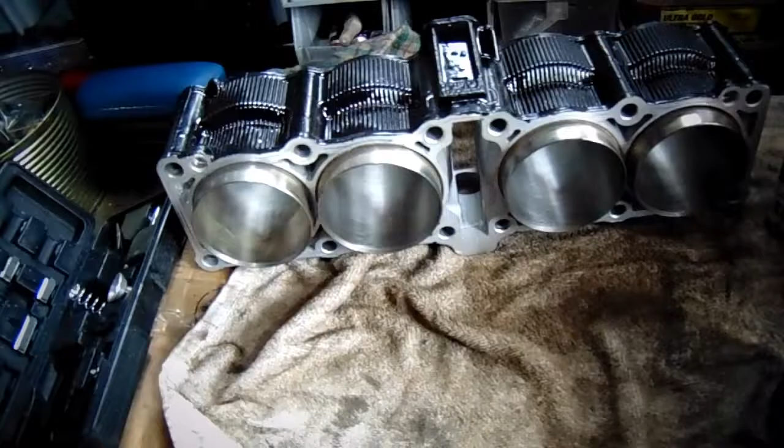Hello guys, so while I'm waiting for the gasket set to come for that, I figured I'd get the barrels down and give them a go with the old hone.

Yep, I use that when I'm a bit bunged up. I just get it up there and it doesn't half clean you out.

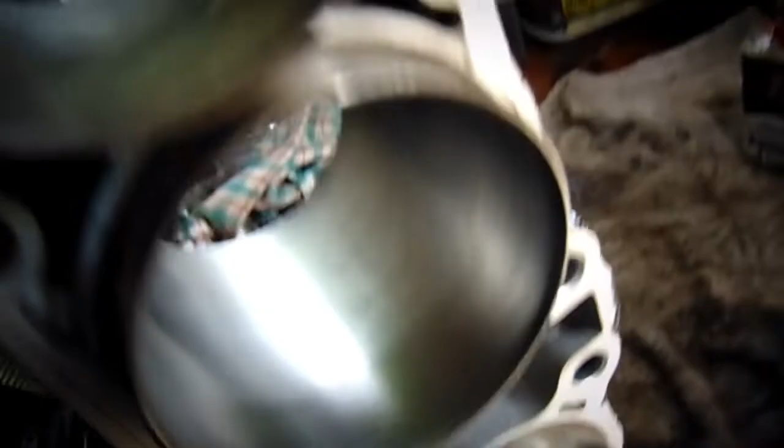Anyway, I've done the bottom three, and you can probably see where I've done it. Come on, I don't even know if this is focused in. Like I say, my eyes are going. So I've got this one to do now, so I shall do that one.

And then what I'll do then is get the pistons and start measuring them, seeing what size piston rings I get and stuff. So two seconds while I hone that one.

So they're now honed. Oh, there's a tiny bit of paint there that I just need to get off. So I'll get that off in a minute. So they're now done, lovely jubbly.

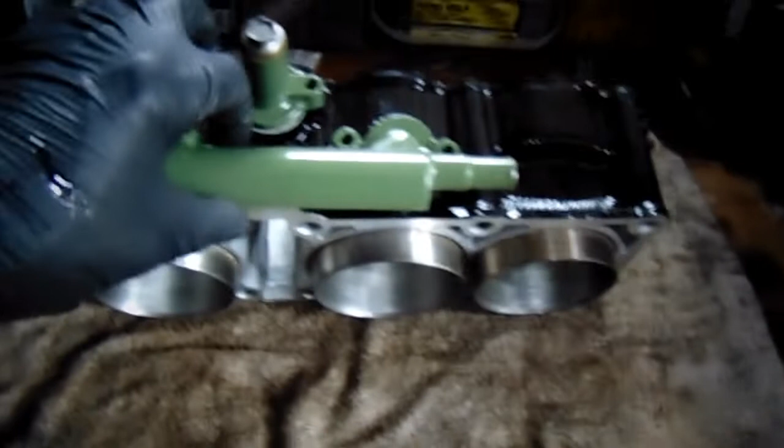And that's how it'll look with the cam chain tensioner and the water pipe on there. Look alright, that. So anyway, I've only just literally sat them on.

Right, so now what I'm going to do is, this is number 1, number 2, number 3, number 4. I'll get a bit of paper, write it down, and start measuring these now. Once I've measured these, then I'll put a bit of oil in, and we'll go from there.

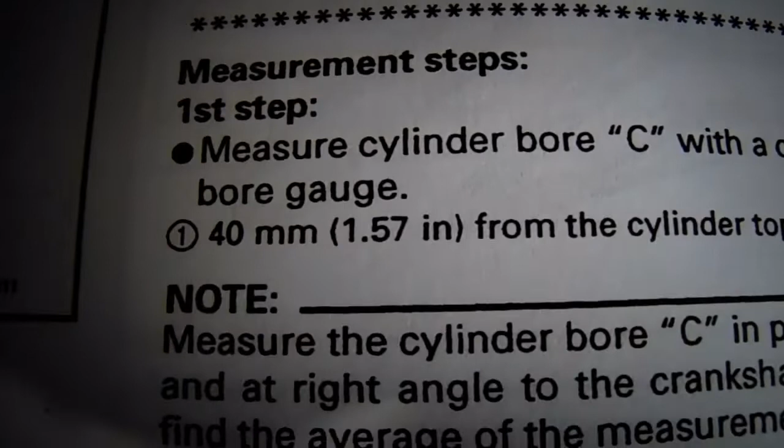So the manual says you measure that distance down from the top of the barrel, which is 40 millimeters. So I shall measure that, and I've got to be in between, is it 75.500 to 75.505?

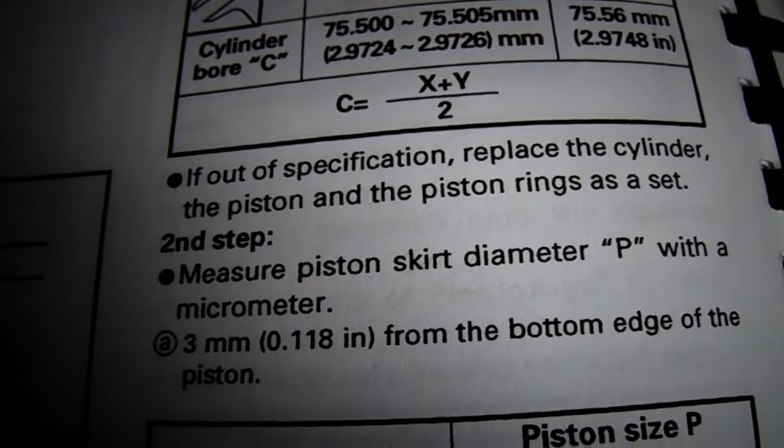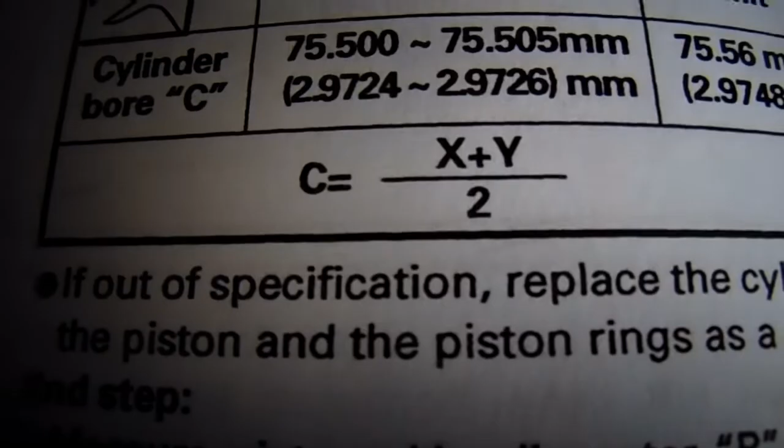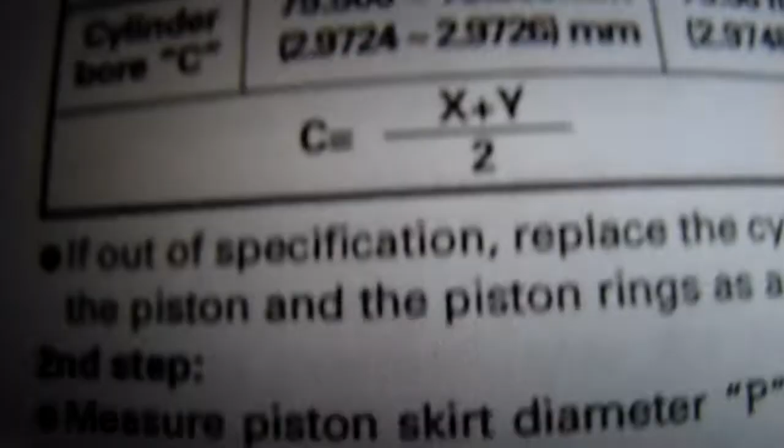So what's that? C equals x plus y divided by 2. Oh yeah, right, okay. So I add the x and the y. So no, I measure x, measure y, 40 millimeters from the top, and then divide by 2 to get whatever it is. Right, two seconds.

So I've now measured number 1, number 2, number 3 and number 4 with my internal bore gauges. Then I measure it with the micrometer. Then I do the calculation.

So for cylinder number 1, the x is, and I've done the x that way, and then I've done the y that way. So for number 1, 75.41, and the y is 75.35, and then x plus y divided by 2, that's 75.38.

But anyway, right, now I will do the pistons. So the piston, measure piston skirt diameter P with a micrometer, 3 millimeters from the bottom edge of the piston. Right, okay.

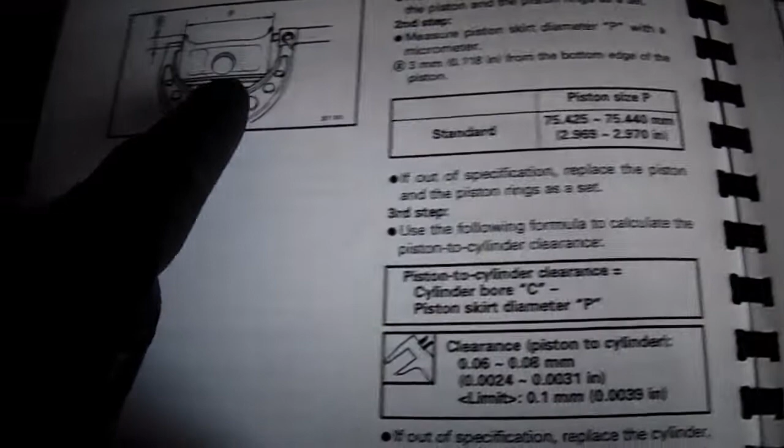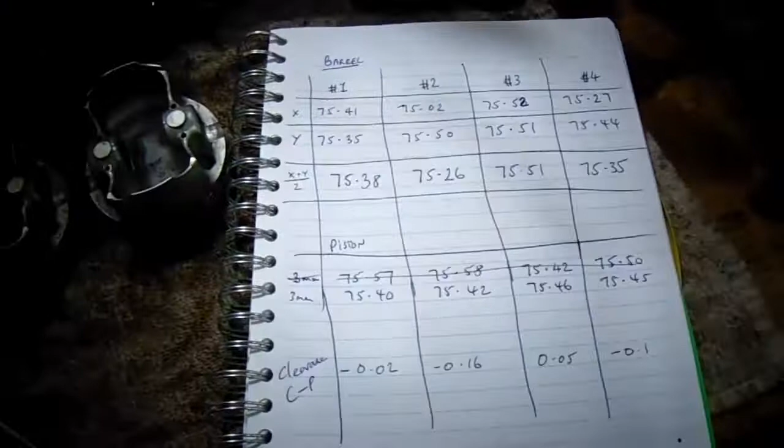So I've measured the pistons and the barrel, and I've done the clearance, but there's something wrong. I think my measurements were wrong, because for number 1 I got 75.38, and then the piston measured 75.40.

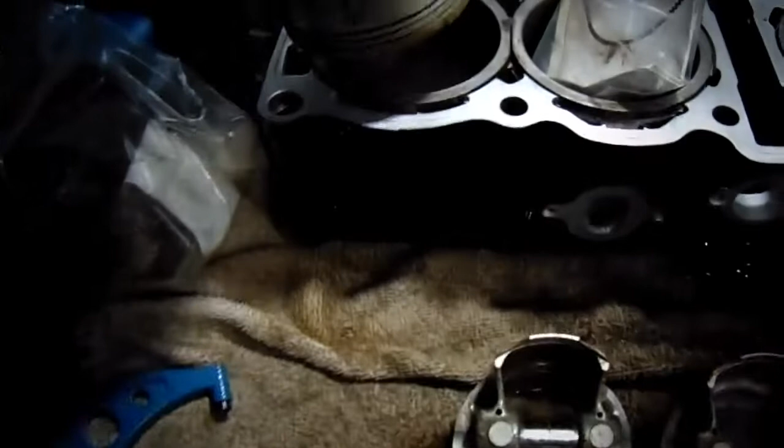So you subtract, take away that, and it gave me minus 0.02. Well, that's clearly not right. So it's saying that the piston is 0.02 of a millimetre bigger than the barrel. But as we can clearly see, that goes in quite easy.

And then for number 2, it said it's minus 0.16, and again that's a load of bullshit, so I think my measurements are wrong. Well, they're definitely wrong, aren't they? So what I need to do is...

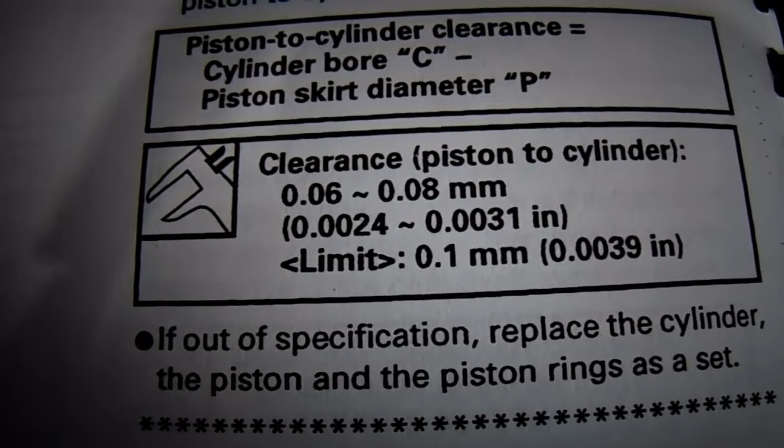I need to do some more measurements again. So I need to do all these again because I've clearly done it wrong. The sort of figures I should be getting here, according to the manual, are between 0.06 and 0.08. So that's clearly wrong, is that?

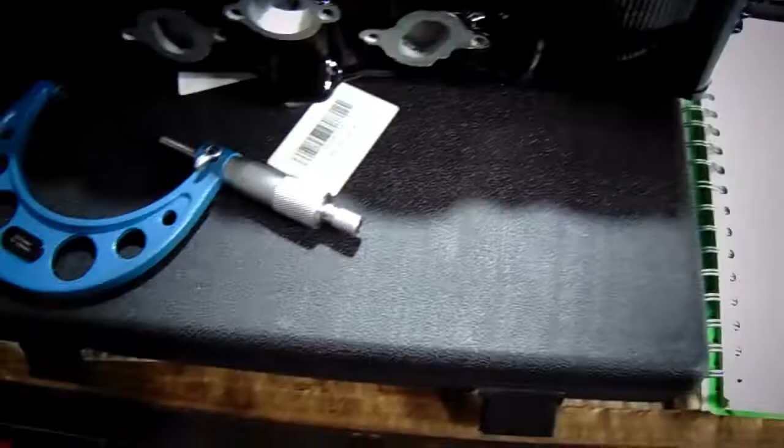Right, I'll do it again. Right, I've remeasured the bores, but this time what I've done is I've just dropped the pistons inside, so that I can just slide this down and it stops dead and flat like that. Whereas before I was trying to hold it, and that's much more consistent now.

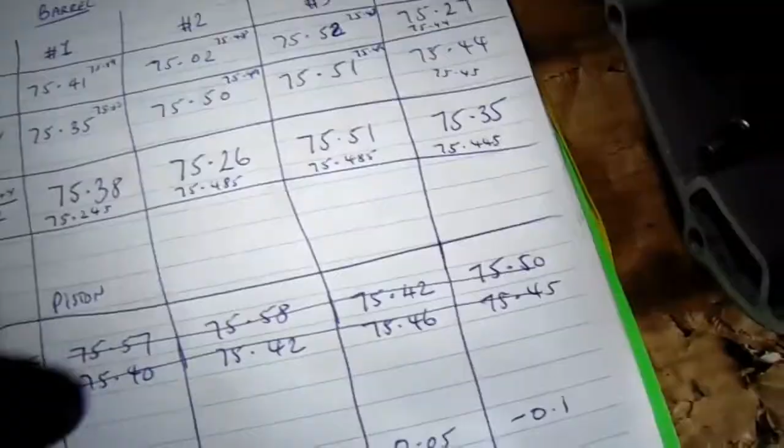So the x plus y divided by 2, for the second measurement, I've got 75.245, 75.485, 75.485 and 75.445. So I will now do the piston skirts, I think, and we'll see what that is.

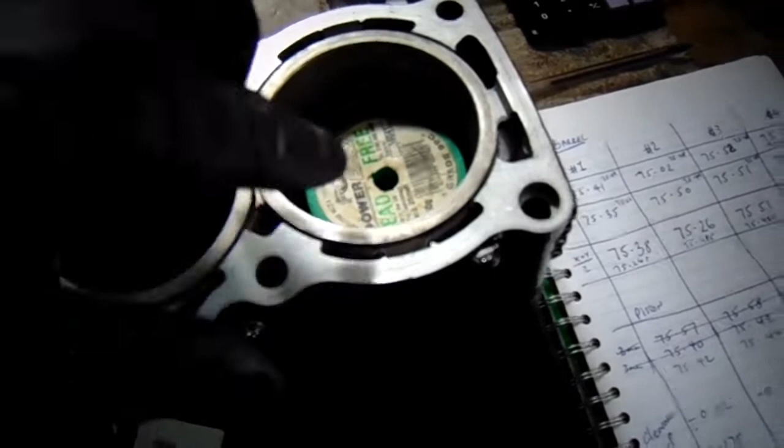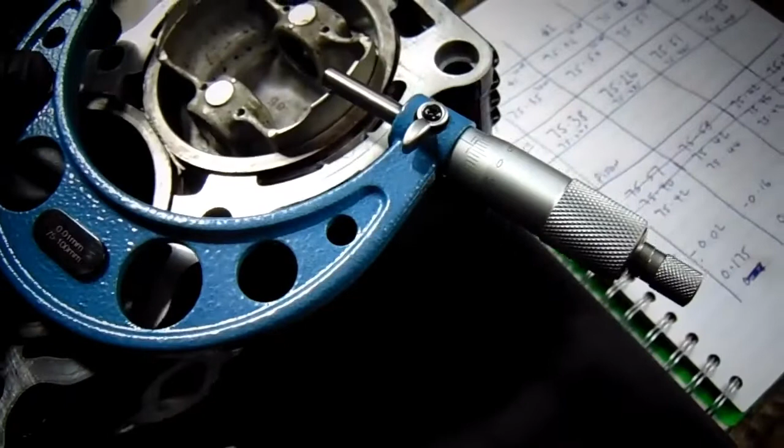Right, so what I did to measure the skirts was I've just got a tub of solder here, look. And I just dropped that in, making sure on all of them that the arrow was pointing that way, the front, and I put it upside down, just dropped it down, and then just measured it. I rested the micrometer, trying to do it with one hand now, on there, and then just measured it like that. I know it says 3mm down, but I measured it sort of like that, if you know what I mean.

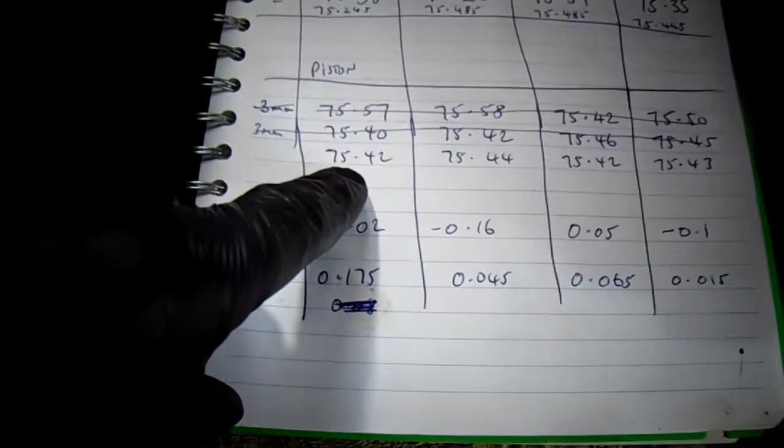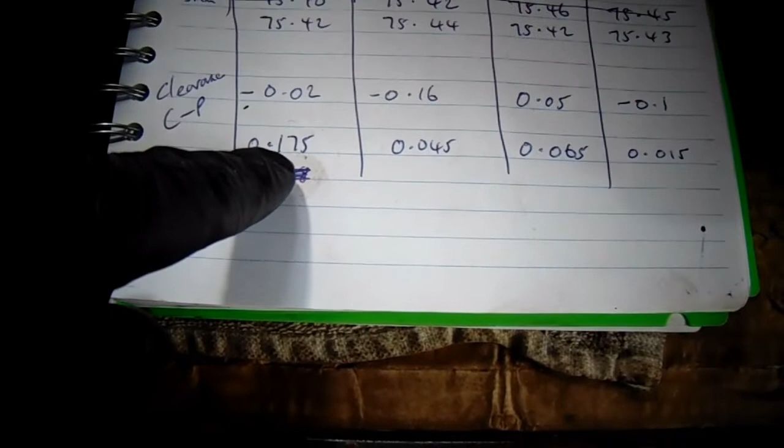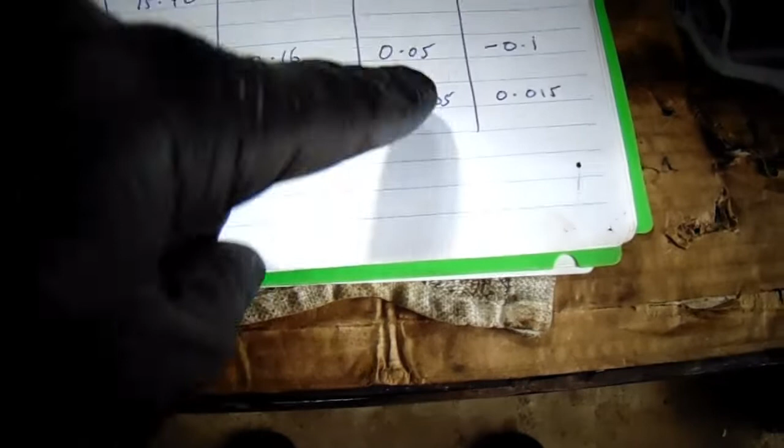Just so that I was trying to keep it level, and I'm still confused because I've now measured the pistons as 75.42, 75.44, 75.42 and 75.43. So that, take away that, and I get 0.175. That, take away that, and I get 0.045. That, take away that, and I get 0.065, and that, take away that, I get 0.015.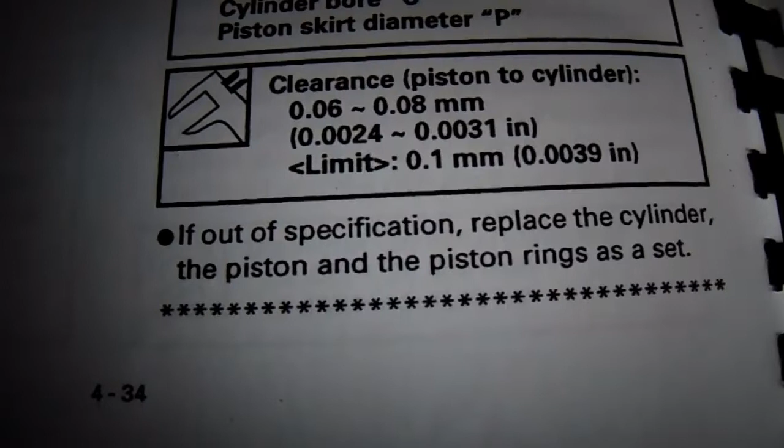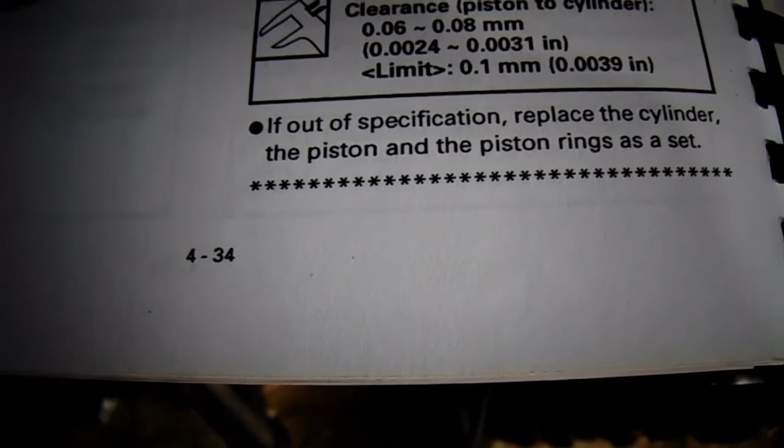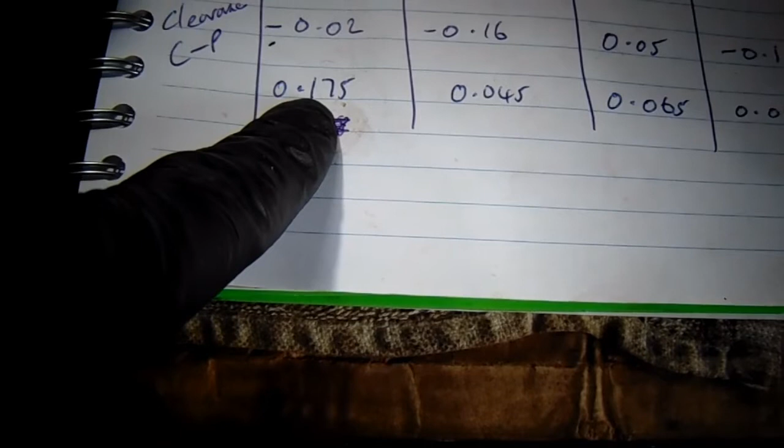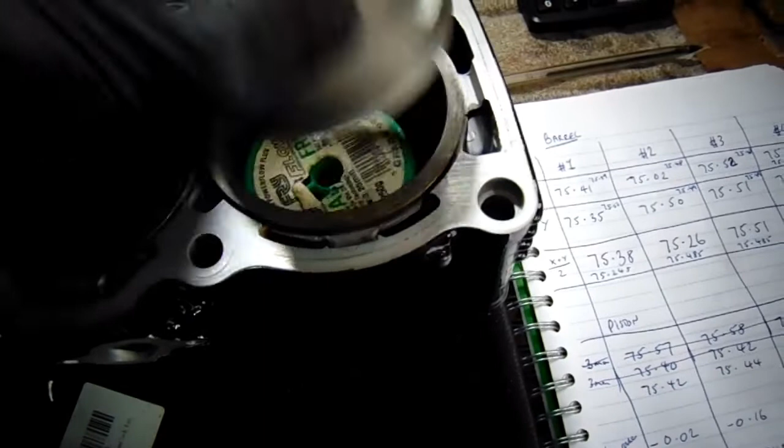So I'm confused because it says the clearance is 0.06 to 0.08 and the limit is 0.1. So does it mean that number 3, 4 and 2 are within the limit, but because that's 0.175, that's just out? I've no idea, I'm confused. So I think I'd better do some reading.